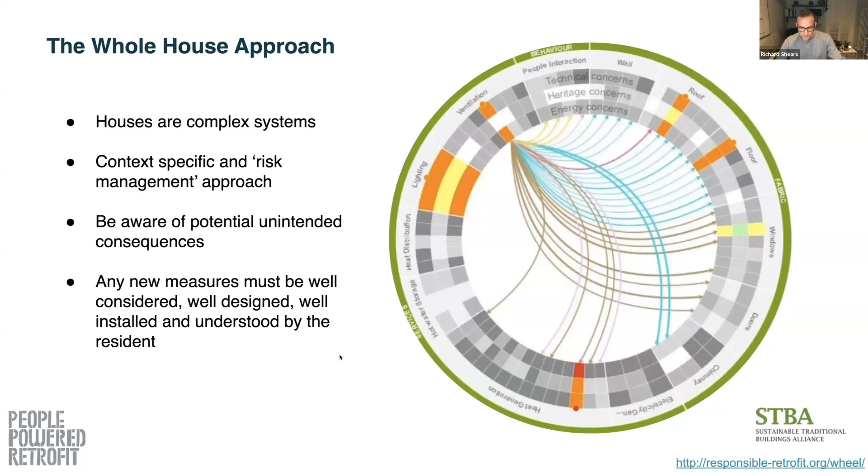Okay. So this is a diagram created by the Sustainable Traditional Buildings Alliance, which you can find on the internet. You basically put in the measure that you're doing, and it will show you the different areas that it might affect. So as you can see from that diagram, it's a pretty complex process, and there needs to be a lot of consideration for all the different measures that you might possibly do. It's a balancing act between the different priorities of making your house energy efficient, but also not damaging it or creating a bad air quality.

The approach that we normally use is a fabric first approach, which effectively means doing the fabric measures first, or planning to do them first, and then adding the rest in afterwards. So adding in heating and lighting second, and ventilation, and then going for the eco bling, things like solar panels, at the end. It's been the approach that most people take to retrofit in the 10 years that I've been doing it. But I'd say that more recently, now that the grid is a lot more decarbonized, it's maybe a softer approach, and considerations of, say, the character of the house or the age of the property are also involved. And it may be that you have to jump to ventilation or heating before you do the fabric. But that's all in the retrofit plan.

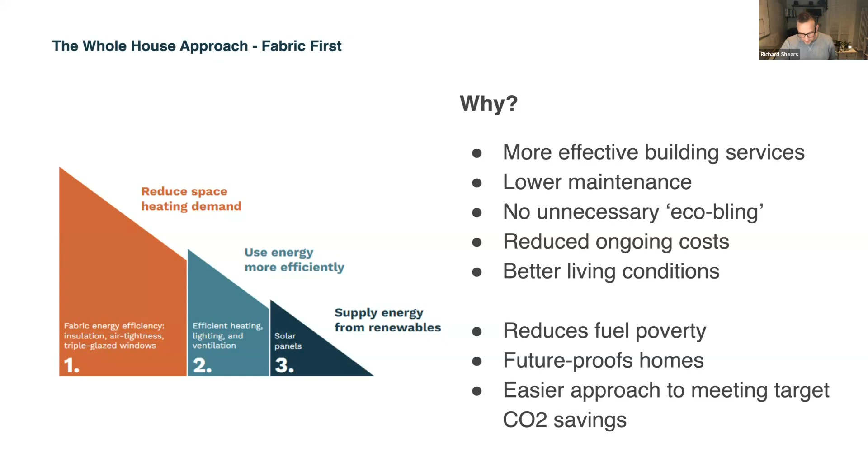So if you want to put some answers into the Q&A about why insulate, what is it that's important about insulation? It's something I've talked about a huge amount, and it's mainly my day-to-day topic of conversation, which I never thought it would be when I was in my 20s. So yeah, energy efficiency is one of them, but things like reducing the heat loss of the house, reducing the heat demand, reducing the peak heating demand, and overall comfort as well. These are all benefits that you get from insulating a house properly.

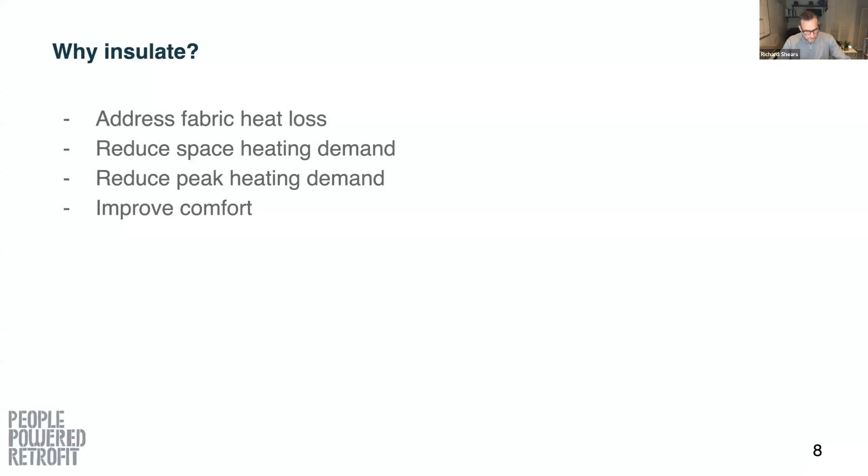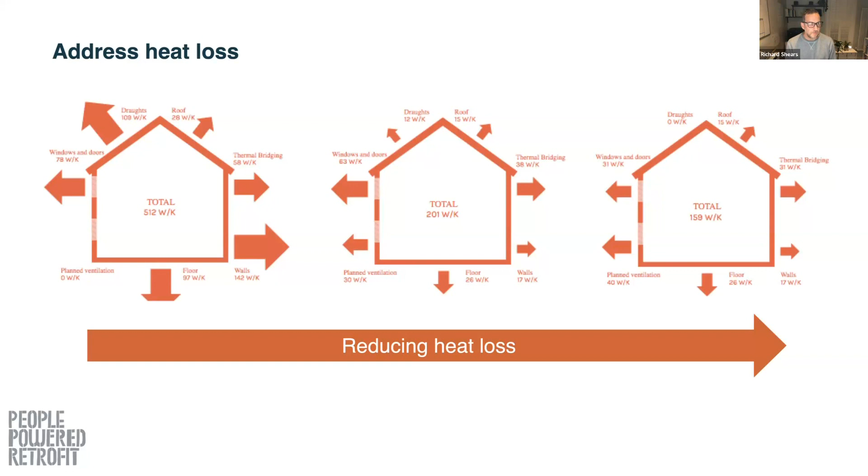We work to standards, or we try to work to standards, that we need to work to a target to prove that we've done it properly, and to show that we can make a building perform better. And when we model it, we model where the house is now and where we're hoping to get to.

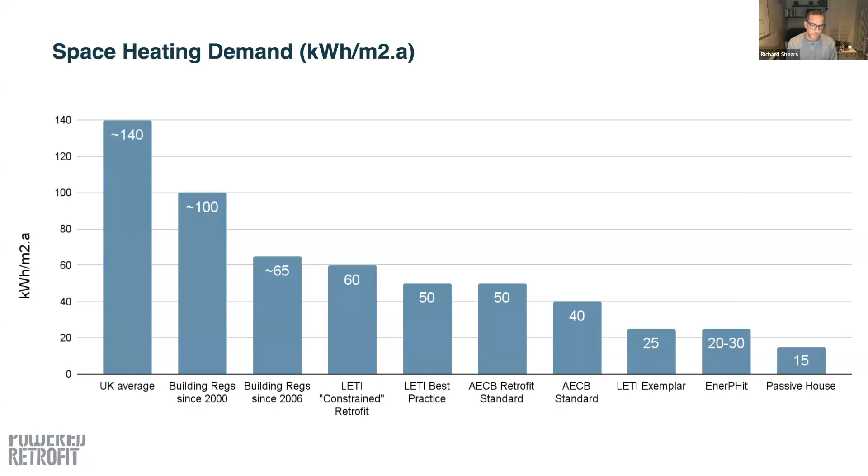A more realistic target may be the AECB standards, either the retrofit standard or the AECB standard. These are much more practical, achievable targets. You can see here some of the actual achievements of houses that have been done. So these are taken from Carbon Co-op's early work.

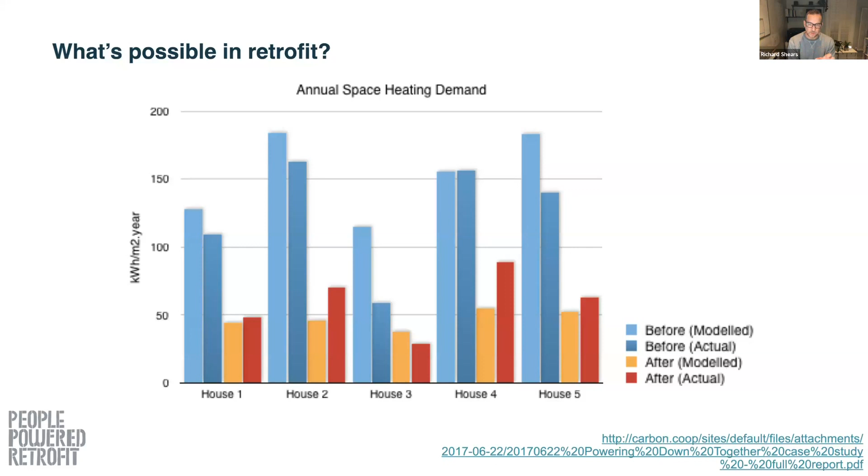They modelled the house before and found what the actual heat loss was for the pre-retrofit, and then they've shown the modelled after and the actual. You can see the huge difference, not only between before and afterwards, but also between modelled and actual. A model is just a model, and it doesn't always reflect reality. Sometimes they're pretty good, and sometimes there can be quite a big discrepancy between them.

So one of the key parameters is the peak heating demand, which is a way of describing the heat input that a building requires in order to maintain a comfortable internal temperature on a cold winter day. So it can be described as watts per degree Kelvin times the design temperature, or sometimes it's displayed as the watts by degrees Kelvin, and the design temperature is the difference between a nominal outside temperature and the temperature that you want the house internally to be.

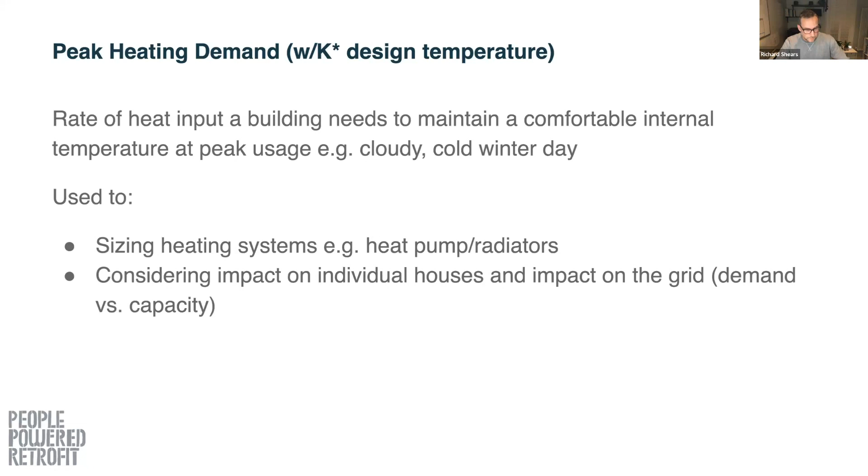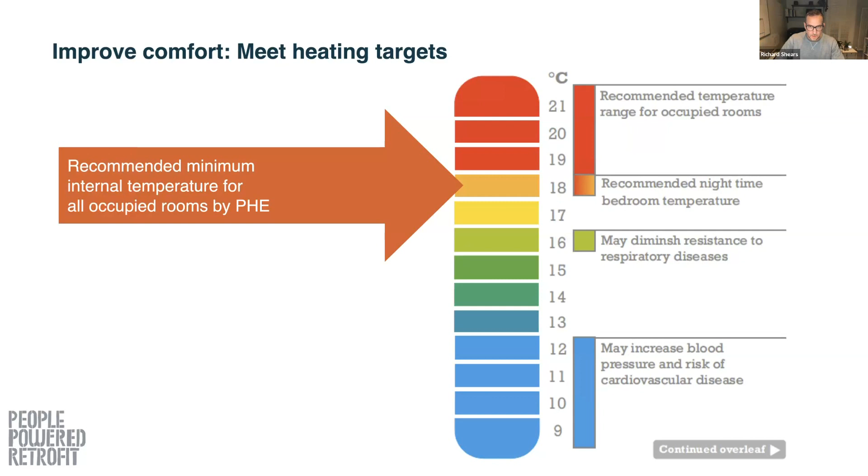This diagram shows the differences in internal temperature. So Public Health England specify that houses shouldn't really be below 18 degrees, that you can end up with problems of mold and damp, respiratory diseases, and that ideally it should be between 18 and 21. Obviously, taking the peak heat demand from the slide before, the higher your target temperature, the higher the peak heat demand will be, and that means the more energy you need to put in, and the higher the cost will be.

So a big part of why we insulate is to keep ourselves warm during the winter. The heat goes through the building fabric, and when you insulate it, you reduce conduction through the walls, but you also increase the surface temperature. When you increase the surface temperature, you lower the ability for mold to grow and lower the possibility of condensation, two major problems in houses.

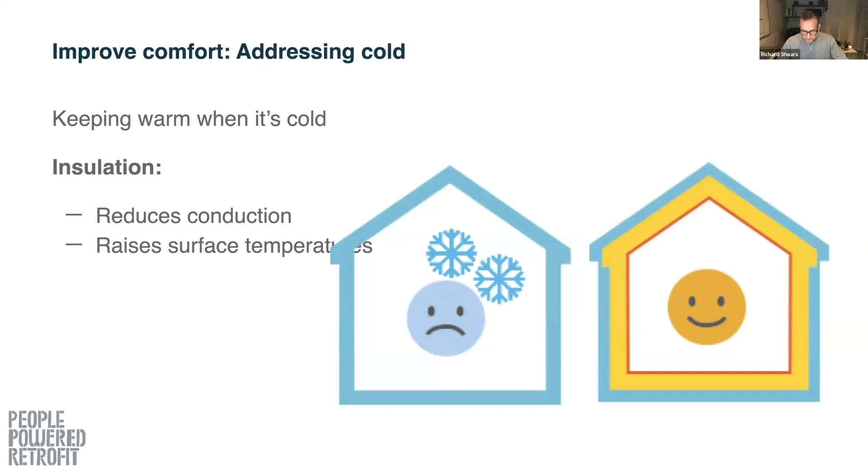But it's not the only aspect that we look at these days. Increasingly we talk about its cooling effect as well. So during summer, we're increasingly needing well-insulated houses to reduce problems of overheating. When you're planning your retrofit, it's not just about the insulation, it's also about the amount of glass, the placing of glass, the type of insulation you might use. If you use more natural or dense materials, then you get a benefit called decrement delay, which is the slowing of the heat going through the property.

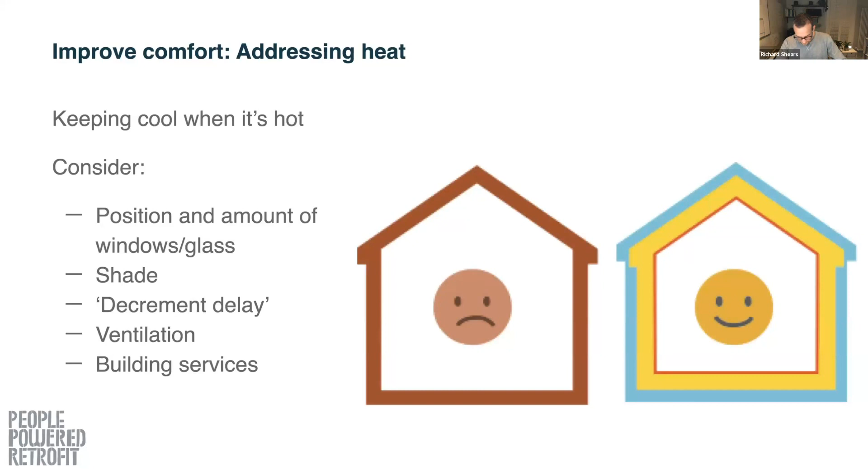And then there's the issues of building services going through the insulation, or the increased need for ventilation. If you really highly insulate a house and make it airtight, then ventilation becomes a much more important aspect. So I'm just going to go through the insulation approaches and materials in this next section.

And after 1930-ish, we changed the way we build things. We used a lot more cement, a lot more industrially manufactured bricks. The processes were more industrial, so it's a lot less breathable. I don't particularly like that term, but everyone seems to understand it. Post 1930, it's less breathable, but pre 1930, much more breathable. There's more vapor diffusion going through the fabric.

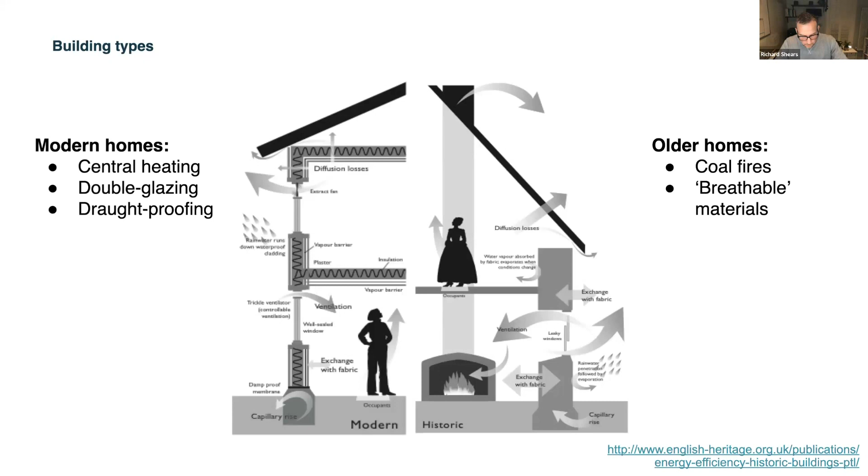So, going to go through the different elements of a building. Obviously, we have walls. I'll go through floors and roofs at some point, but let's start with the walls. Pre-1930, a lot of properties were solid wall. Like I say, solid wall, breathable, vapor permeable. We used fires a lot to heat them, so the heat often pushed the moisture out. It wasn't so important to have it insulated because we had sort of roaring fires going.

Post 1930, the construction changed; it was much more common to have cavity walls, and the heating system started changing to central heating, which heats the air, and so it's more important to have a more airtight building, and it doesn't really suit the way our houses were built, which is kind of where we've got to now, where we need to retrofit.

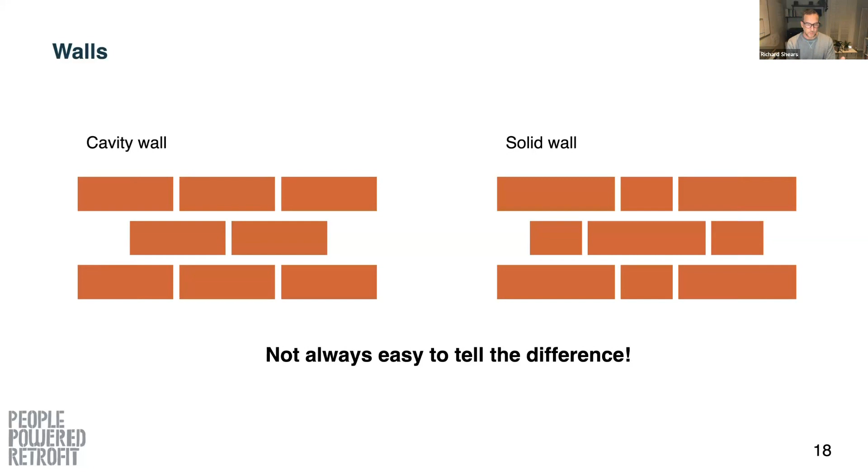We can insulate cavity walls. They weren't meant to be insulated originally. They were actually first created on the coast to try and create some barrier between the inside space and the outside space. So you'd have the air gap, which would stop moisture getting through.

That's a good question. I'll come to that in a minute.

But then from about the 1980s onwards, we started filling them, and initially it was with mineral fiber. It was kind of mineral wool in small pieces that was blown in. That does have a problem with wicking water, that it can slump, and it can cause damp patches at the base of the wall, which basically the water will hit the outside skin, clump into the insulation at the bottom, and then go through internally.

We changed to polystyrene beads maybe 10, 15 years ago, which are better at that. Still not amazing. The problem with that was that they were again blown in, and if you ever opened up the cavity, they'd all come pouring out. There's been a few houses I've gone into where there's been holes in the cellar and there's just piles of the stuff in the bottom where they've not closed them up.

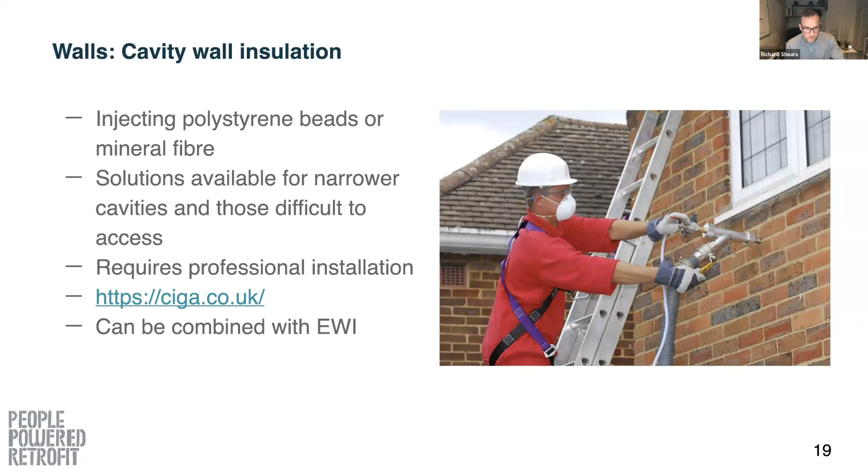With most of you being in Cumbria, I think it's important to note that exposure and the location of where your house is is a really important factor. If you get wind-driven rain or it's highly exposed, it can cause a lot of water to go into that outer skin and cross and make the insulation damp. So it needs careful thought.

There's a few people asking what EWI is. Okay, Tina will answer that shortly.

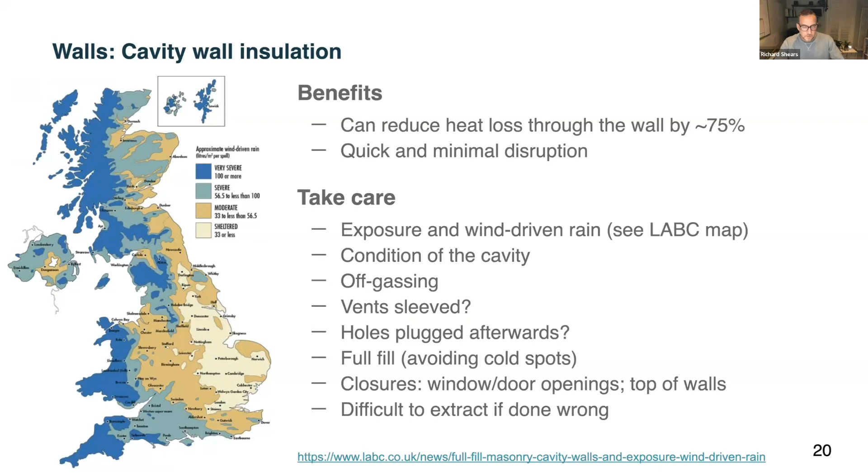Yeah, so just be extra careful if you are somewhere that's exposed. That cavity wall can be a risky solution.

So EWI, external wall insulation. The picture here is of a wood fiber installation, and in traditional buildings, it's a preferred method. It keeps it breathable, and is more sympathetic to the building.

We also use EPS, which is kind of the second choice, I'd say. We use it a lot in Manchester, mainly because for a lot of the houses we do, it's not so important to keep the breathability on the outside. But we try and steer clear of other materials. Things like PIR or phenolic on outside walls, I'm not so keen on that, especially if you've got traditional buildings. Then I'd certainly recommend using a more breathable material.

It performs better than IWI, internal wall insulation, and you have a range of options for finishing it as well. It doesn't have to be rendered, it can be clad, and there are also brick slips that kind of imitate a brick wall, or you can tile, so you have more options with the look and aesthetic of the installation.

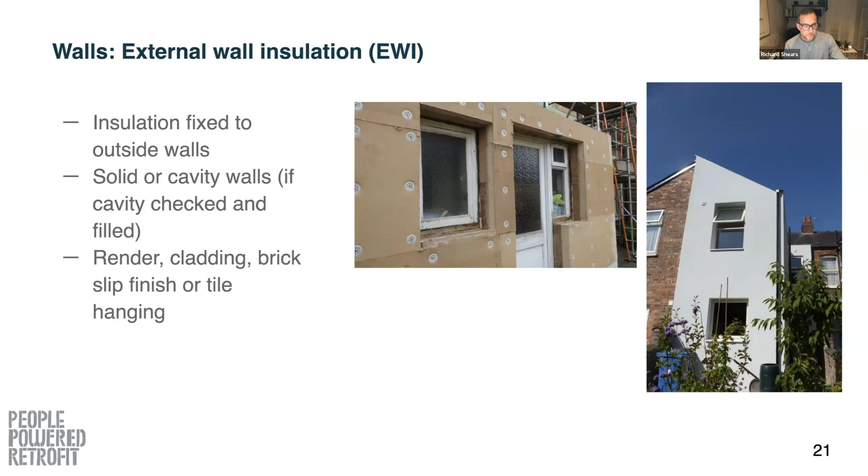The detailing is a really important aspect of it. I don't know if you can see the detail of this picture here, that there's this big red stripe down the edge of the building where there's been a lamppost. And instead of thinking of a detail to mitigate the lamppost, the installers have just left a big gap up the back. So there's going to be an awful thermal bridge internally and a potential for condensation and mold, and a huge reduction in performance of the actual element as well.

External insulation has the added issues of planning permission, and more recently, building control are much more nervous about fire risks. So if you're going to be using wood fiber or combustible material, or potentially combustible, there'll be more conditions about where you can put the external wall insulation. So it's definitely worth checking with building control and planning permission before you start.

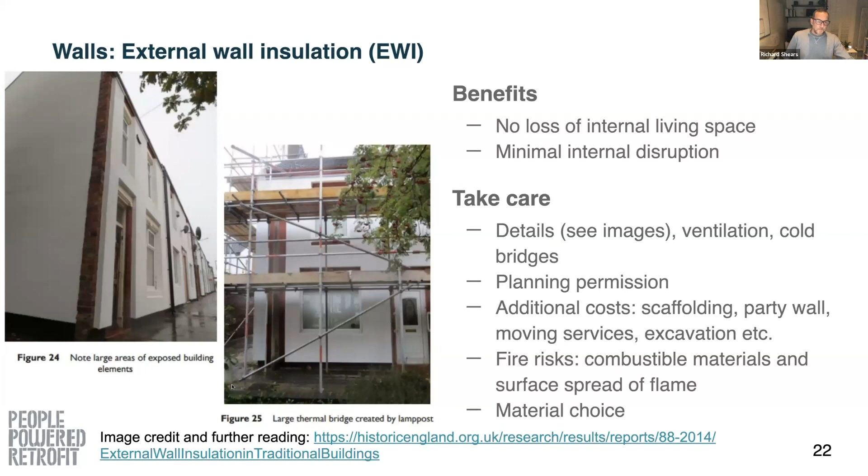An alternative to external wall insulation is internal wall insulation, which, as you might guess, is put on the inside of a room. As I alluded to earlier, it's not quite as effective as external wall insulation. You end up with more thermal bridges, and you maybe can't go as thick internally as you can externally. So you are limited on the performance you can get with it. And again, I'd also say it's more risky than external wall insulation. You're effectively cooling the wall down on the outside of the house and not allowing any of the heat internally to get to it. So you can open yourself up to problems with damp or condensation.

And certainly the method that you use to install the insulation internally needs to be much more suitable to the property that you're doing. If it's traditional, then you definitely need to keep it breathable. Certainly need to use vapor open products, things like cork or wood fiber, things like insulated plasters like diathonite. And if it's traditional, I'd certainly stay away from the foam backed plasterboards. They're vapor impermeable, and the methods that they're recommended putting on can cause issues as well. Ideally you want to be adhering the boards directly to the walls. You don't want to be leaving an air gap behind it.

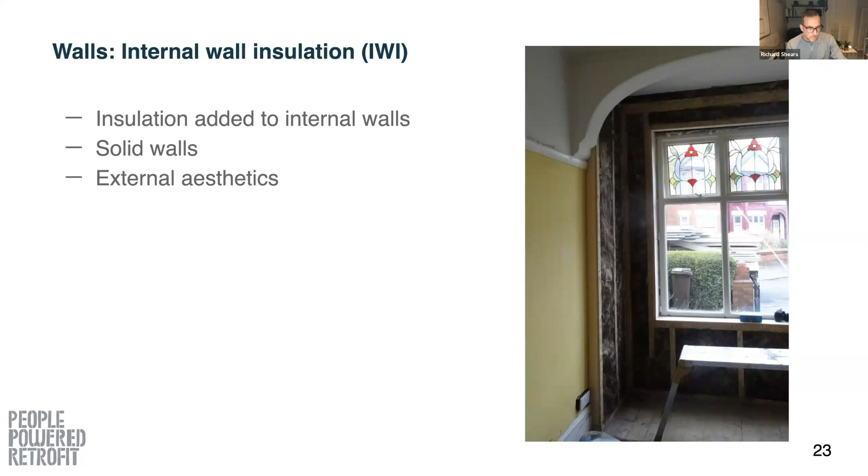So yeah, there are some added considerations with internal wall insulation: like I said, moisture movement through the wall, and air tightness is really key. Making sure you detail it correctly at the base and at the ceiling height or past ceiling height. If you're going to do a ground floor and a first floor, make sure you take the insulation all the way up through and don't leave that air gap in between the two rooms.

It says at the bottom there, hanging pictures, but think about what's going to be happening in the room afterwards. Is it a kitchen? Do you want wall units? Is it a bathroom? Is there going to be a shower on the wall? You really need to plan these things before you start, because once you get the insulation on the walls, it's a little bit difficult to go back and start again.

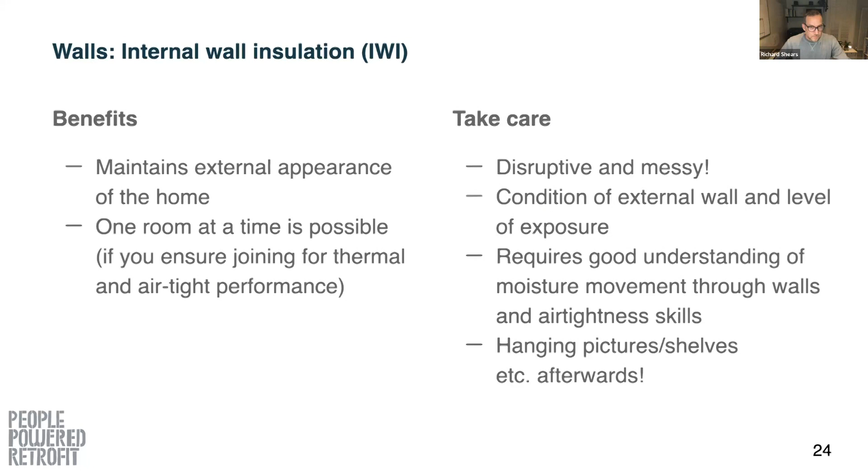This is a typical method that we use in Manchester, that planning are quite happy for us to insulate externally down the side and to the rear of a property, but quite often they're not so happy to do it at the front, so we keep the character of the property. So on this one, you can see the rendered block down the side, and internally on the front, they've done internal wall insulation. So you still get the same wrap around effect, but it's just done in two different ways.

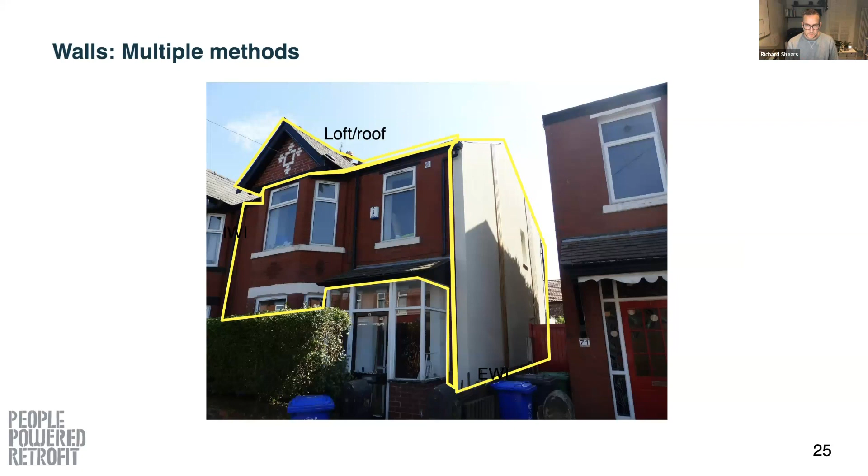When you do it like this, then the junction between the internal and external is where you need to think and make sure you get a good design detail to make sure you don't get any problems with condensation.

So loft insulation, it's fairly straightforward.

The majority of people know about it, even if there's still about 30% of lofts that haven't even been done yet, which is kind of astounding given the amount of government grants we've had over the years. This is just a case of rolling loft rolls out into the loft. It's pretty much a DIY job, although you can get people out to do it.

I think the main considerations with this would be air tightness around lights, that sort of thing, around the hatch, and also at the junction between the loft and the wall at the front, because quite often there's not a lot of space to get any insulation in. With more traditional houses, you might have attics or loft rooms, which are more tricky to do. More often than not, it needs a different strategy.

Again, in my opinion, it's keeping it breathable, trying to find a dense insulation like wood fiber so you can take advantage of that decrement delay effect, which in summer when you've got the sun beating down and the rooms are heating up, the dense insulation will slow that heat getting through, which does sound like that's what insulation is meant to do. But if it's a foam board, then although they do slow the heat down, they don't retain heat and they don't have that delaying effect.

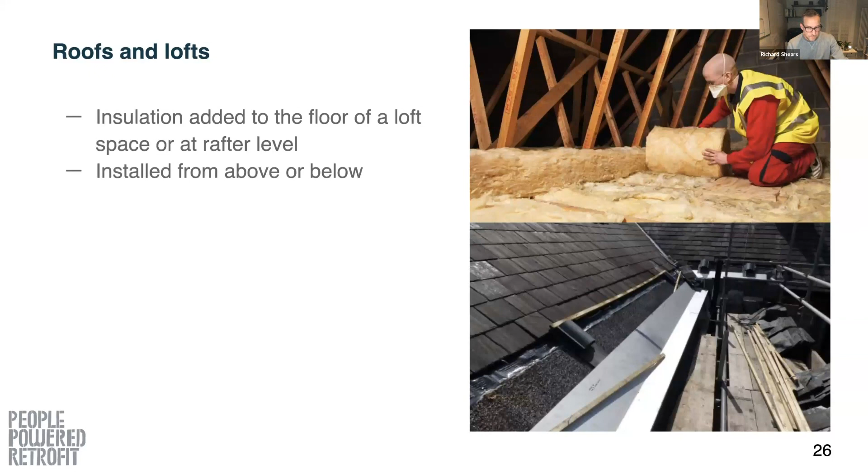So yeah, lofts and roofs, condensation is quite often an issue, especially if you've got a loft space that's unheated. Quite often if the hatch isn't very good, or if you've got holes for pendant lights, then you end up with condensation in the roof. So although you can insulate it to good effect, you need to make sure there's good airflow in those unheated spaces above. And taking care of cables, lighting, other obstacles like storage tanks.

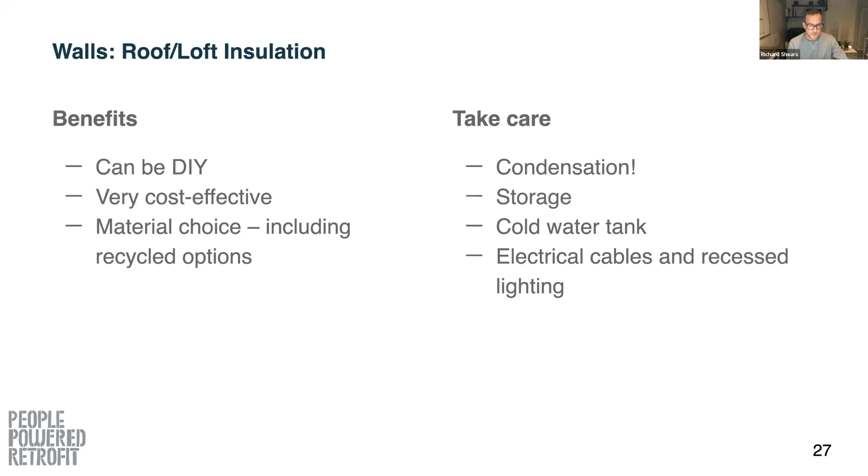And I did mention loft rolls, which are a typical choice. You can also use things like sheep's wool these days, or flexible wood fiber insulation as well, if you want to go for a more natural material.

Okay, floor insulation. So that's an interesting question, mixing materials. It does seem like a waste to take out existing loft insulation, but I suggest that if you're thinking of adding extra insulation, so if you've got say 100 mil of a typical loft roll and you want to put sheep's wool on top, or, I think I'll save that till the end. Tina, maybe we can answer that at the end.

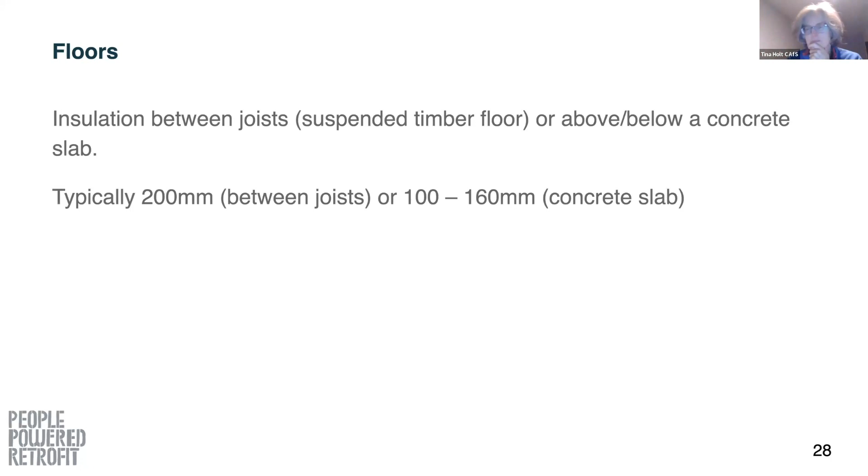Sure. So floor insulation. There's two main types of floor. There's solid floors and suspended timber, and they each have their own issues. I'd say it's the most risky element to insulate. You really need to be careful and to plan it properly. Really think about what you're going to do.

Traditional suspended timber floors were often where a lot of the fresh air would come into a house, and if you close that off, in one way that's good because you're getting rid of drafts, but in the other instance, you're actually shutting off any of the ventilation that gets to the floor, and if the floor beneath isn't well ventilated, then you can cause real problems with damp and rot of the timbers and of the subfloor. So yeah, taking care to get the details right.

If you're going to do it, I would say make it airtight. So you make it airtight on the warm side, add a membrane underneath to lower wind wash, but ensure that your subfloor is still getting a good amount of ventilation going to it.

With a solid floor, the considerations and the risks are slightly different. Obviously, with floors being solid, you can't really add a huge amount on without having to change door heights or change a lot of the ground floor. You can dig out existing slabs and insulate underneath, which is a common way of dealing with floors, but both options are expensive and disruptive.

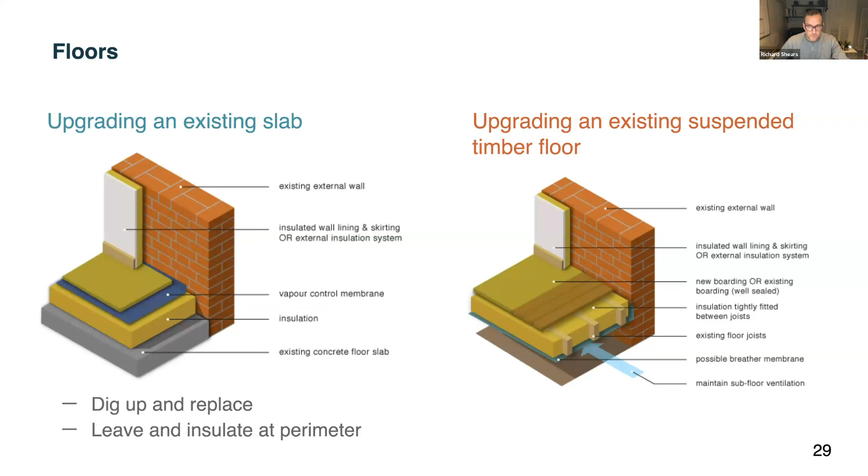Yeah, so I think I mentioned everything there. The subfloor ventilation is key. Getting a good condition check of the floor before you start is the best place to start. Maybe getting a damp survey, making sure there's no existing damp.

And junctions with the wall are also a consideration. If ultimately your plan is to do wall and floor insulation, you need to be thinking about the junction between them. So bringing wall insulation down to the floor, and making sure it marries up with the floor insulation. And again, this will have an impact on airtightness.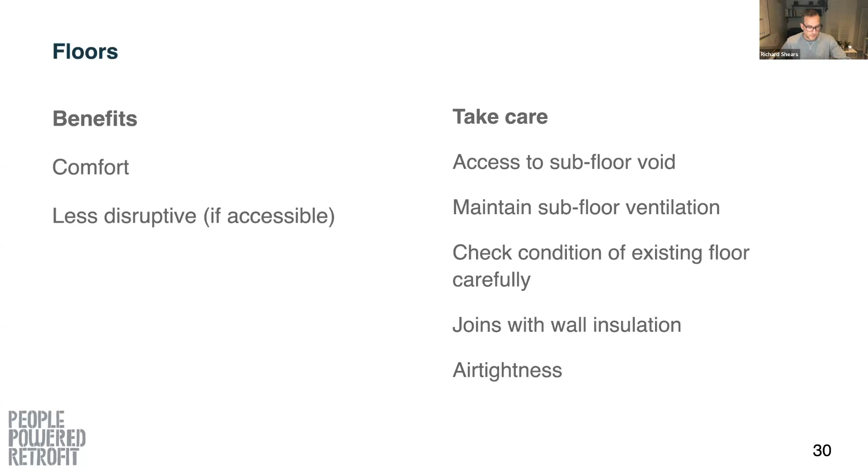Materials. Now, I've talked a little bit about materials as we went, but I'll see if I can deal with it a bit more thoroughly here. So there are a range of materials to use. They all have their different characteristics and different advantages and disadvantages and considerations that you need to take care about.

Obviously, I think the first one is probably petrochemical versus non-petrochemical. A lot of the reasons why we're retrofitting is to try and reduce carbon emissions. And if we're using a petrochemical-based insulation to do that, how much are we actually reducing our carbon emissions by? Although the manufacturers will tell you that there is a benefit, from one of the government's own studies, they realised that doing a house fully with petrochemical boards only reduces the amount of carbon saved by a very small amount over the lifetime of the insulation.

So I'd always suggest trying to use natural or sustainable materials first. Not always the easiest solution. Sometimes the benefit that petrochemicals or foam boards have is that their performance is much higher, so you don't need so much thickness. So I'll just run through a few of the different materials.

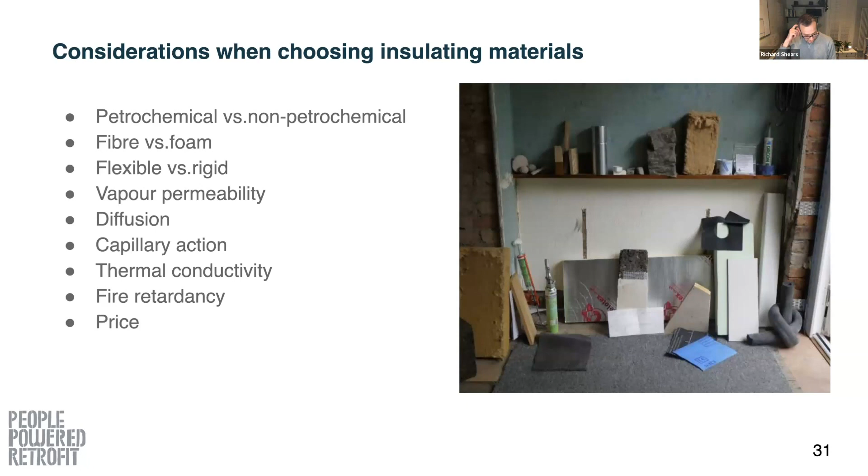Yeah, you need a very thin amount to get the same amount for other materials. It's not great at handling moisture. And the reason why you might only want to use it around windows is because it's hideously expensive as well. So it's used sparingly, I think, is the best way to describe this. So there we go, pink phenolic.

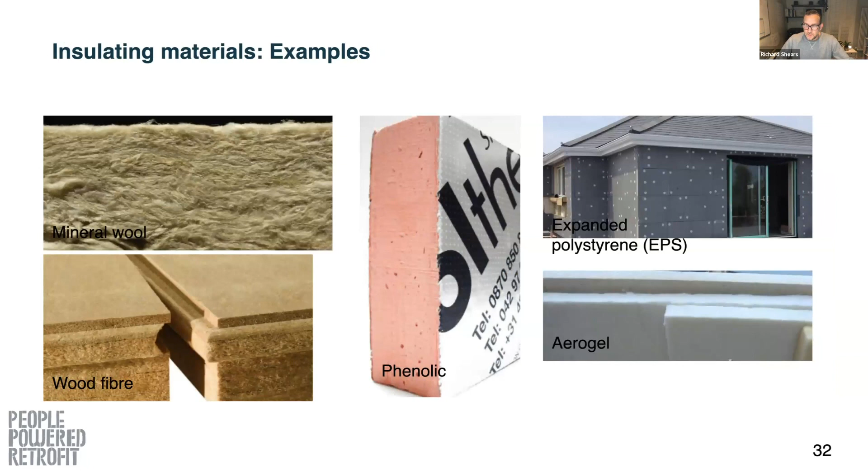So it's great if it's going to be in a wet environment. It really does stop that moisture getting through. Whereas even something like EPS might have a problem with damp if it's continually wet.

Go on to windows and doors. Right. I realised I've done it again. I've not got through everything.

So windows and doors. Windows and doors are the weak point of any retrofit. They're the hardest to insulate. They're the hardest to improve. So I'd say use triple glazed windows, or the best windows you can afford, to try and limit the heat loss through doors and windows.

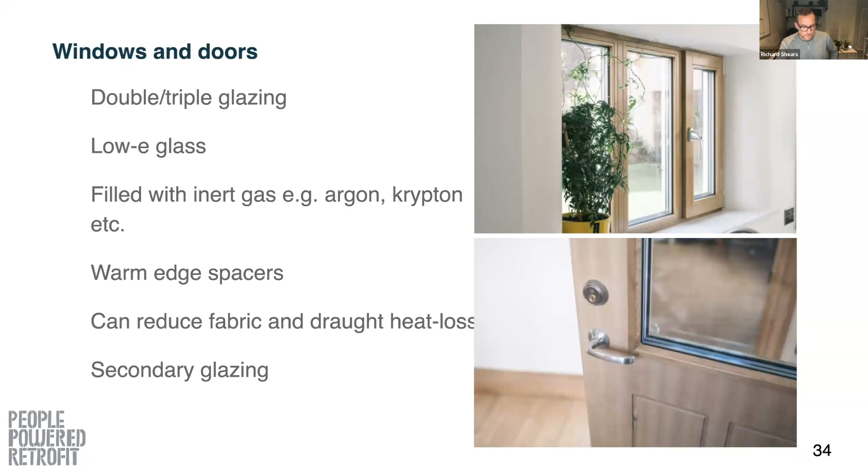So just as a quick recap, the main aspects that we should be looking at or planning when you do a whole house retrofit are the insulation, air tightness, always have an air tightness strategy, and then a ventilation strategy as well. These three kind of go hand in hand.

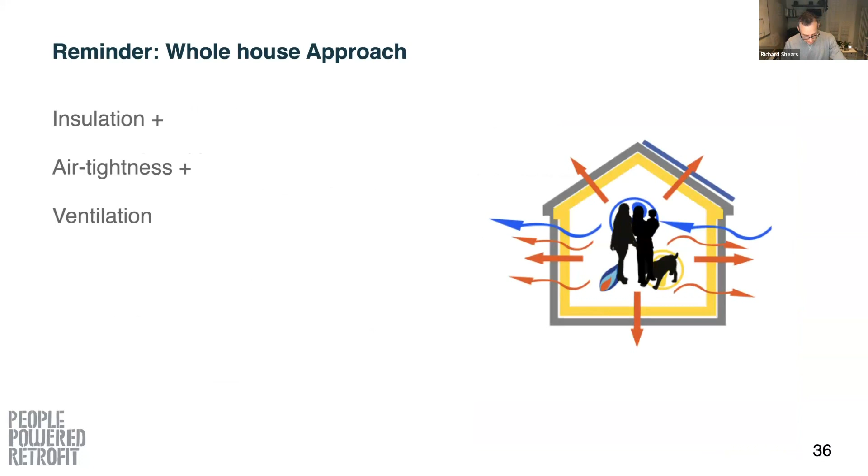So the next one's a knowledge check, but I'm actually going to skip through it and go on to the next section, which is about U values. And again, I'm probably going to try and skip through this pretty quickly. It's quite involved, quite technical. But basically the way that we model or measure buildings is by using U values.

So all materials have a K value, which is its thermal conductivity. The higher the number, the more conductive the material is. And we use it as a way of comparing different materials. So you can see there that PIR is down at 0.022, whereas something like mineral wool or wood fibre is about 0.035, so about half as effective. So you'd need twice as much material to get to the same U value.

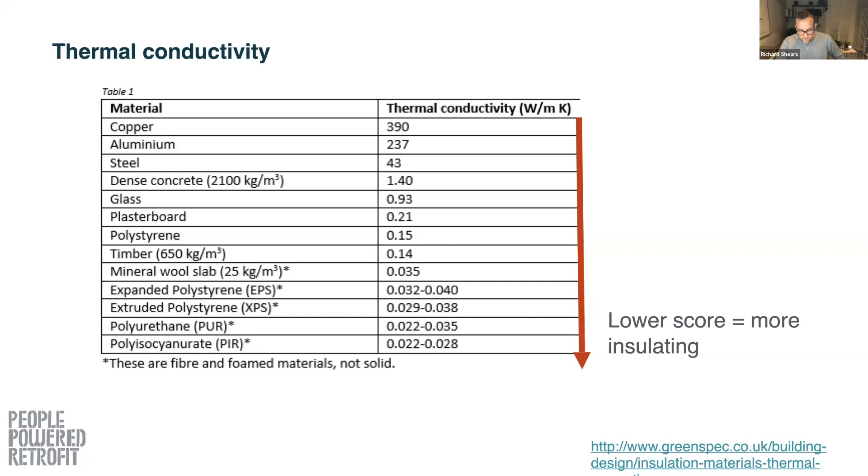Each material has its own U value, which is a combination of the conductivity and the thickness of the material. And each material is then added up through the whole assembly of the wall to create the full U value for the assembly.

So on this example, you've got the surface resistances internally and externally. You've got an internal plaster layer, the masonry wall, the external insulation, and the render, and all 4 or 5 of those layers build up to make the full U value.

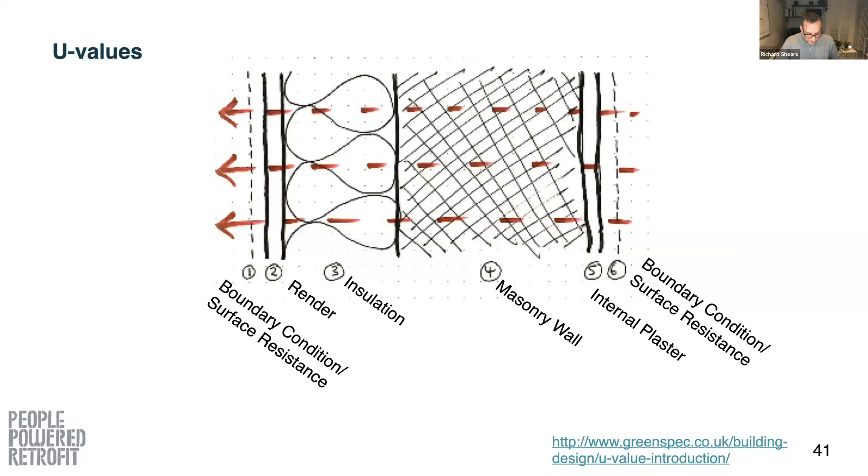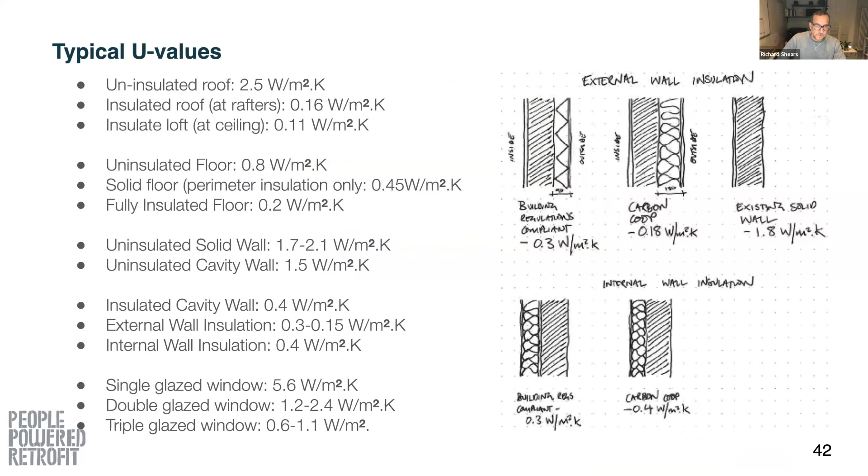These are some of the targets that we aim for, or some of the nominal values that we have. So you might have, say, an uninsulated solid wall with a U value of between 1.7 to 2.1. And once you add insulation to it, that would drop down to 0.3 or maybe 0.15 if you go really far. So you can see the difference between values for insulated and uninsulated walls.

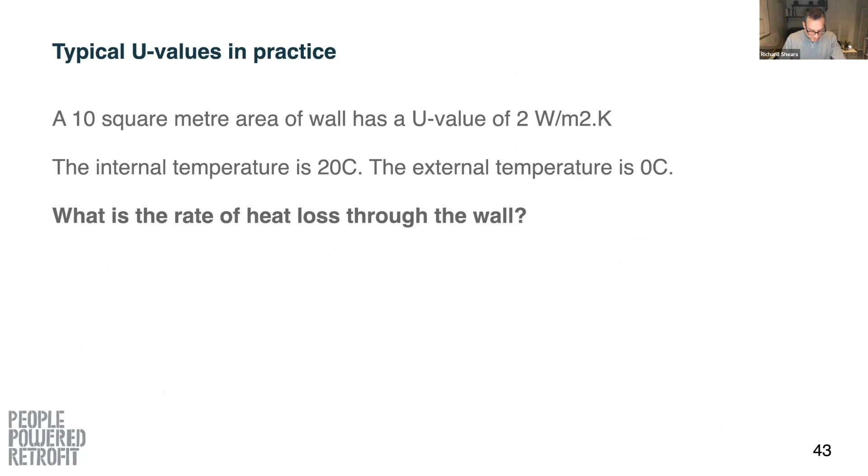So if I go to the next one, the uninsulated wall has a U value of 1.8 and the internal temperature is 20 degrees and the external temperature is 0 degrees. Then what is the rate of heat loss through the wall? So it's effectively 1.8 times 20. And I've covered it over with my poll, so I can't quite see.

The answer is, sorry, so it's a 10 meter square wall, has a U value of 1.8 with an internal temperature of 20. So that means that that wall has a heat loss of 360 watts. And that heat loss is for 1 second.

So if you wanted to calculate that as kilowatt hours, you'd multiply that by, sorry, if you've got the heat loss of 360 watts, if it's over 2 hours, then that's 720 watt hours. So that makes 0.72 kilowatt hours over that 2 hours. So that's an uninsulated wall.

If we change that to an insulated wall and we reduce the U value of the wall to 0.3 watts per meter squared per degree Kelvin, what will be the ultimate heat loss over those 2 hours?

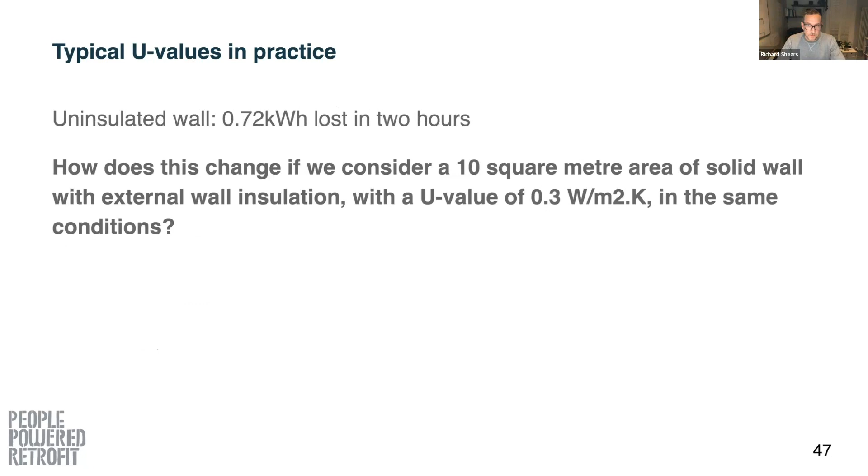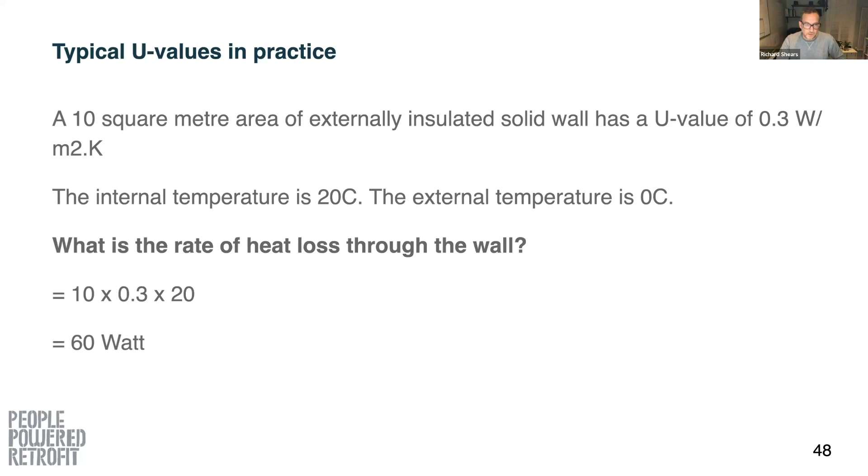So when you insulate that wall, you then have 10 meter square area of wall externally insulated with a U value of 0.3. The internal temperature is still at 20 and external 0. So it reduces the loss through that wall to 60 watts. So it's a sixth of the heat is lost after insulating it than before. So through 2 hours, the 60 watts over 2 hours is 120 watt hours or 0.12 kilowatt hours.

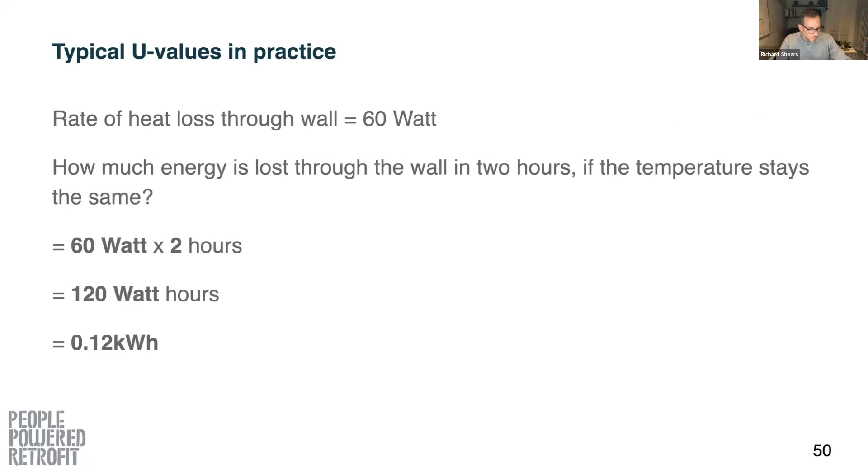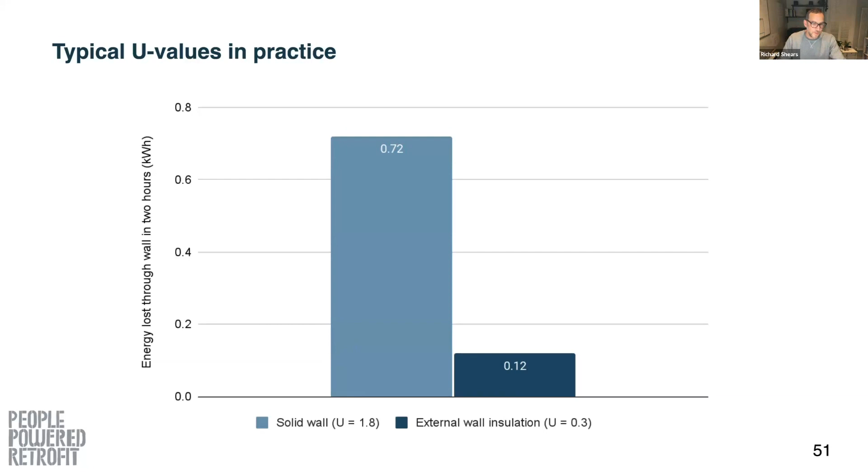So I've really rattled through that because I know I've run out of time. And it probably wasn't very helpful because it's quite an in-depth subject, the calculations of U values. This is a better way of describing it. I should have just skipped to this. So the uninsulated wall there is on the left with its U value of 1.8, and the insulated wall on the right is 0.12. So you can see the drop in heat loss through that wall because of the insulation.

Floors and roofs are calculated slightly differently. It's far more complex. It's to do with the ratio of exposed perimeter to floor area. And I think we can probably skip that today. It's important to know that you do need to calculate it, but it's quite a different calculation. If you need to get the U value of a floor, going to a supplier of the floor insulation is probably the best way of doing it because they'll help you with that calculation.

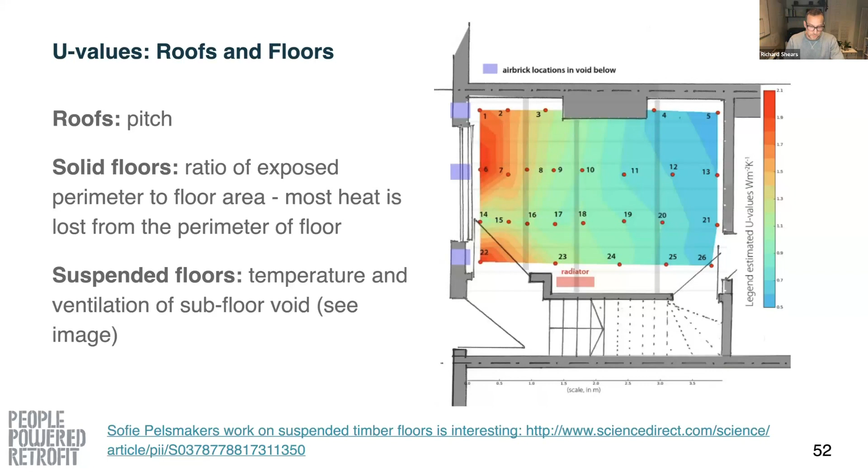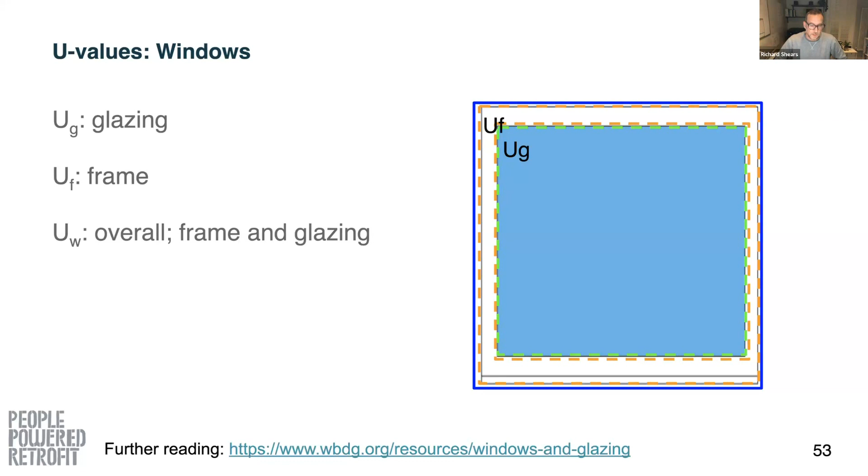Windows, again, a different type of calculation. It's not just a straight U value. It's measured either through the frame or through the glazing. If you go to good passive house suppliers of windows, they'll give you all this information, whereas you might find other suppliers obfuscate a little bit. Doors are calculated the same as windows.

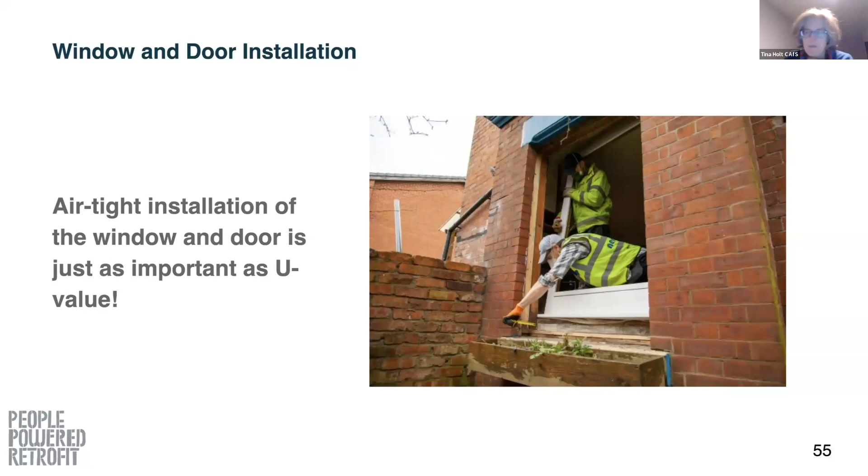So how much do you want me to kind of stop there? There's still a little bit about regulations and standards I think I should probably go through. Yeah, could you just sort of whiz through the key points at a high level then, perhaps? That'd be perfect. Yeah.

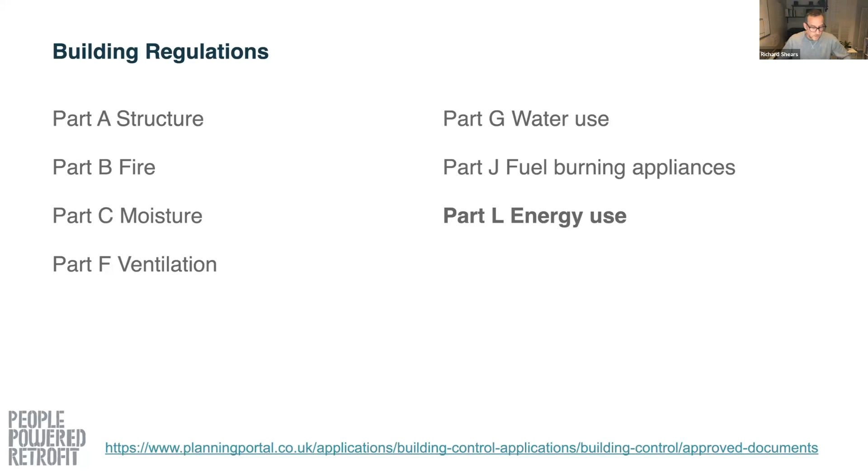So building regulations, these are the approved documents that we work from. I was going to say it's wise to familiarize yourself with them, but it depends on how deep you want to go into the retrofit. If you're getting advice from people, then they will help you with this. But if you're planning on doing it on your own, then it's probably worth having a look through these approved documents. Part L is the most important for energy use, but with all the considerations of retrofit, moisture and ventilation and fire are all important considerations as well.

You can work towards a standard, as I said earlier. So the AECB have a retrofit standard. LETI have released their retrofit guide as well, which is really helpful and actually probably a really good document to read. There's a planning portal which can help you with planning issues in your local area, specific needs, or point you in the direction of someone who can answer questions for you.

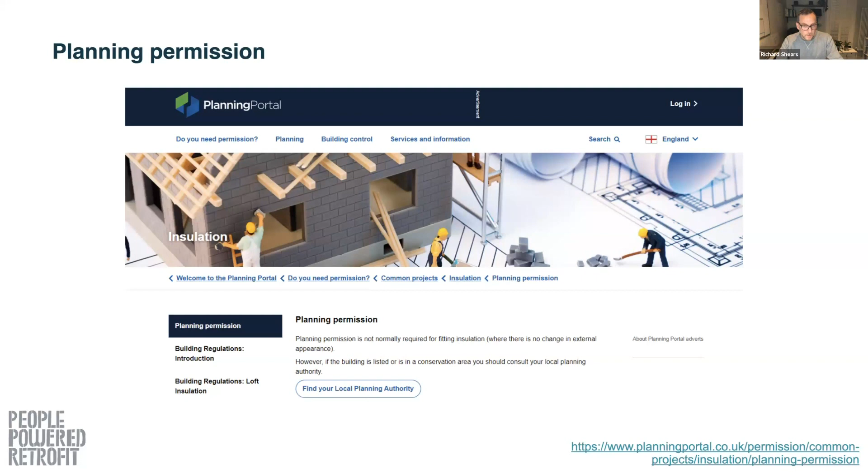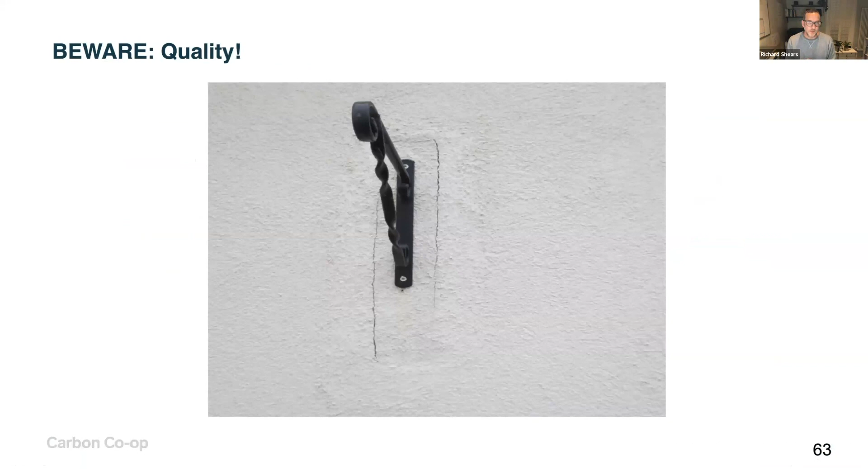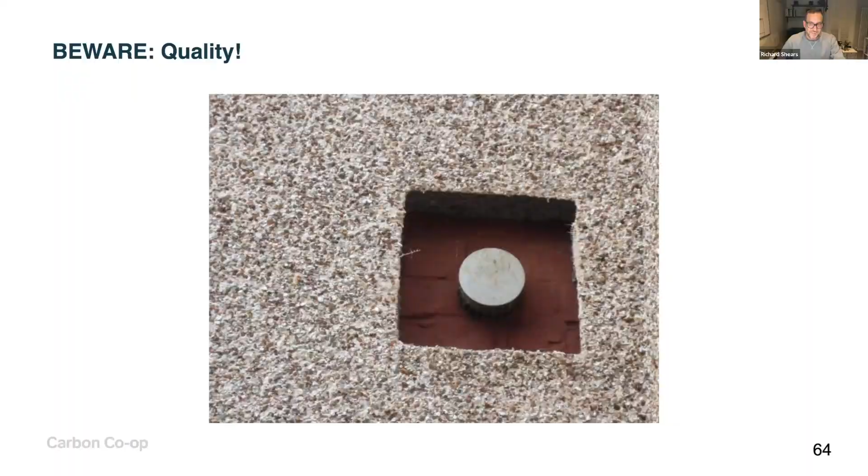Okay, so I've skipped thermal bridges, and maybe I shouldn't have done. So this is an external wall insulation. A thermal bridge is where the insulation can't quite get to an area, and you end up with heat being lost straight through the wall, so there's no insulation around it. Normally on this we ask if you can point out the thermal bridges, but for time I'll just do it.

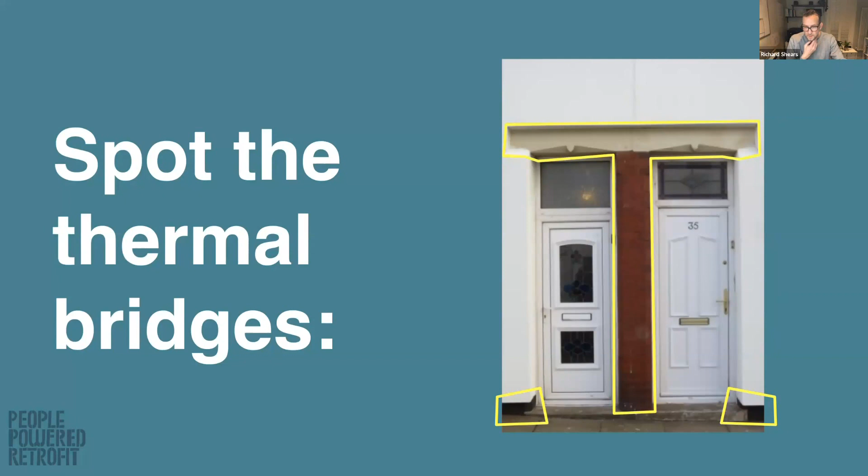So in between the two doors is really difficult to insulate, so you end up with a huge thermal bridge on the party wall between them. And a typical aspect of EWI, they've left the insulation short without putting a plinth on, so you end up with a thermal bridge at the base as well.

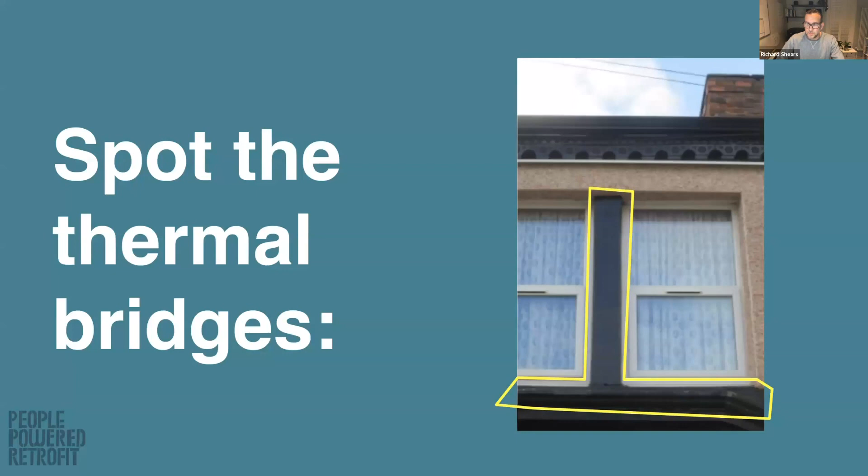Yeah, God, I hate this photograph. This is terrible. So they've not done around the windows, they've not done around the bay, and they've not done along the roof either. So you end up with just thermal bridges everywhere. I almost wonder why on earth you'd bother doing above the window at that point, but they did.

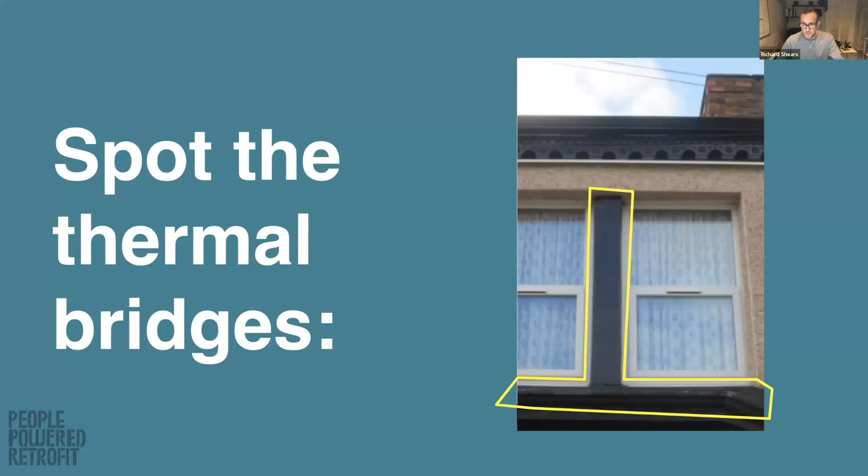So this is where we come to the performance gap: if you model a house with external wall insulation like this one here, you expect it all to be covered and you take the wall as being well insulated. But if it's not well insulated like this one, then you end up with a gap between the modeled value and the real one. And it's something that we're always trying to overcome and mitigate when we plan a retrofit, that you really want the model to show exactly what is going to happen afterwards.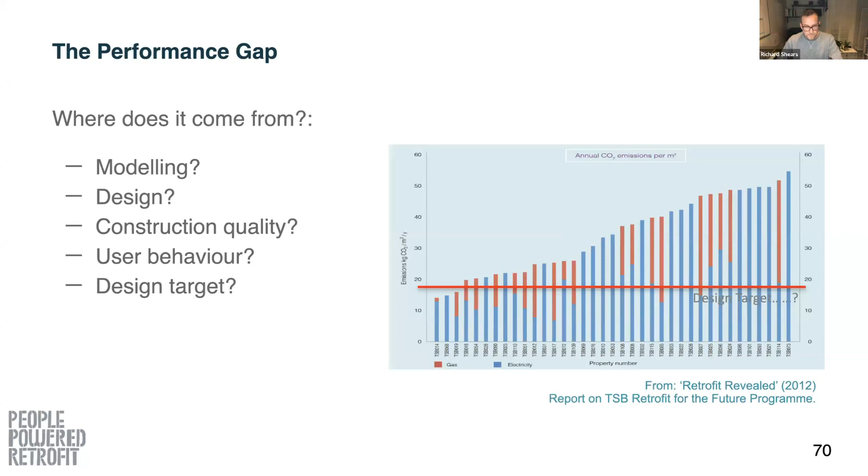So to wrap up, sorry I've rattled through the last bit of that, but the main factors to consider are the performance, what are your targets, what are the standards you're going for, the practicality of your retrofit. Can you go passive, or do you need to be a bit more practical? What materials are you using? Sustainability, vapor permeability, and obviously as well, cost is a major important factor as well.